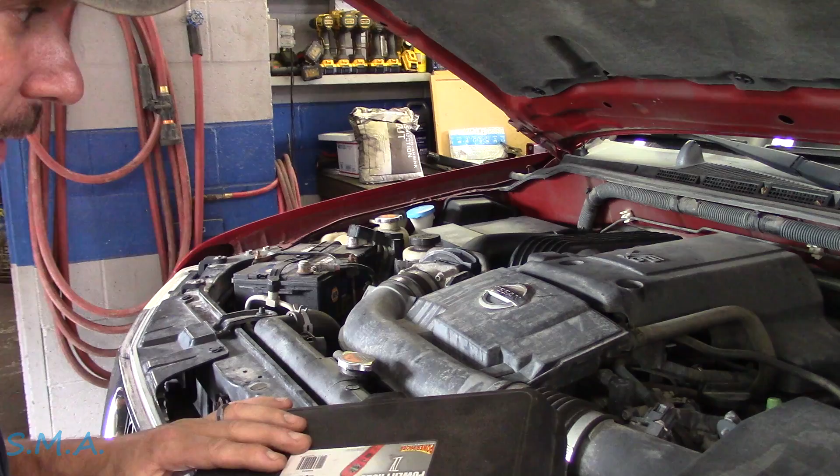I've got it set up on the lift here because I assume we're going to have to go underneath this little guy. Being that we're going to go back and deal with the canister vent valve, I'm going to take the power probe with us. I don't know what kind of bi-directional controls we've got with Nissan as far as being able to command it on and off and stuff. So we want to be prepared. Prepare ye the way. So I'll get this hooked up after I get rid of my giant knot I just put in it. Enhance, unenhance.

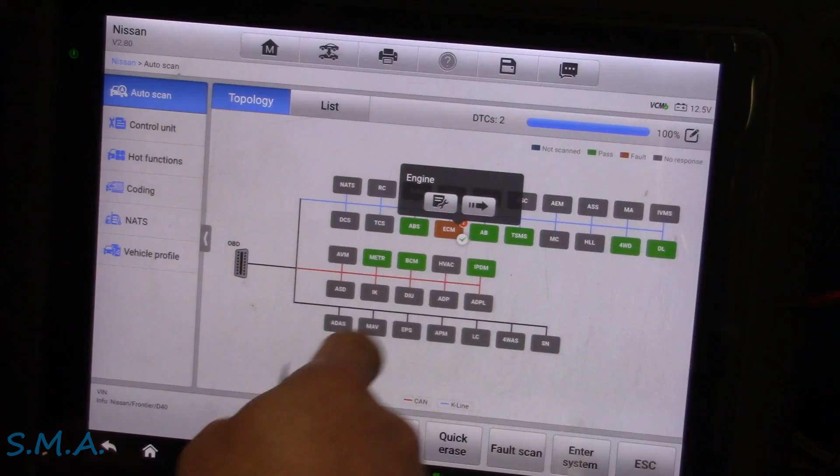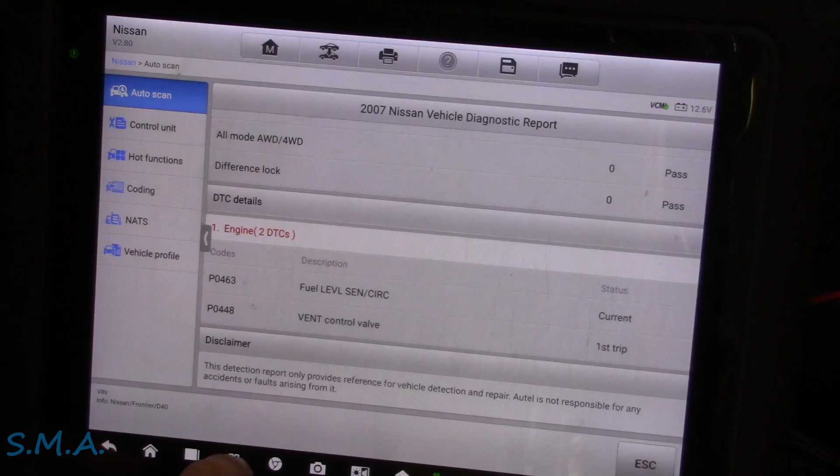She's all done scanning. We've got just the two codes there in the ECM. Everything else is green. I got to remind myself of what they were. So 463 is our fuel level sensor, and then this is just a first trip or a pending code, the vent valve. So that's what we're going to look at first. We will go to our control unit, then the engine, and we'll see what kind of bi-directional control we have for this canister vent valve. And I got our little pick ready so we can go find it and unplug it.

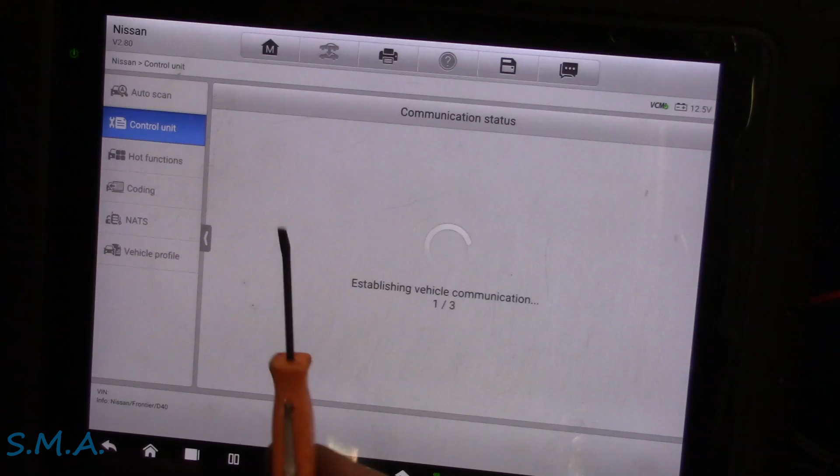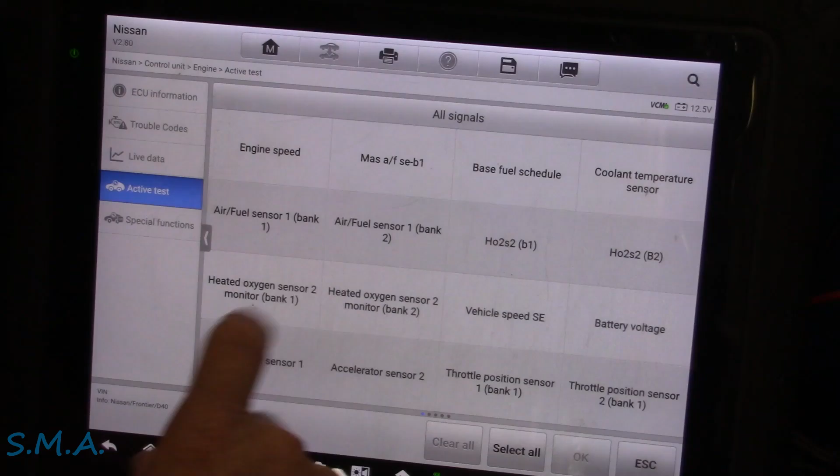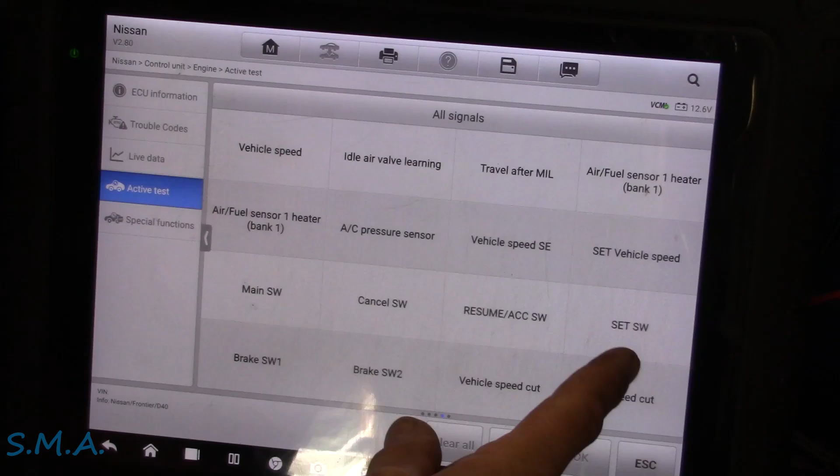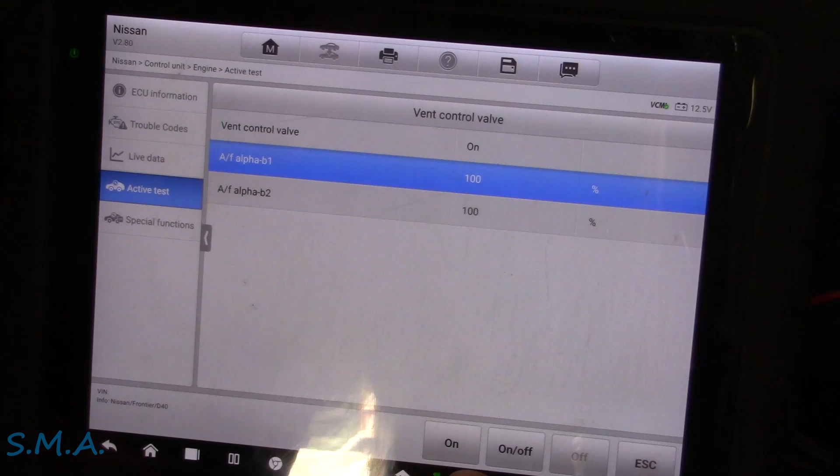We'll go active test, vent control valve. That probably sounds like the ticket. I don't think we need any data, do we? Intake valve, I don't know. Unless we got a PID that tells us that we're actually doing what we're doing. We'll skip it. We don't need any data. I don't hear any clicking underneath the car behind me. Oh, you know what? I think I do actually. Yeah, I'll be jiggered, I do.

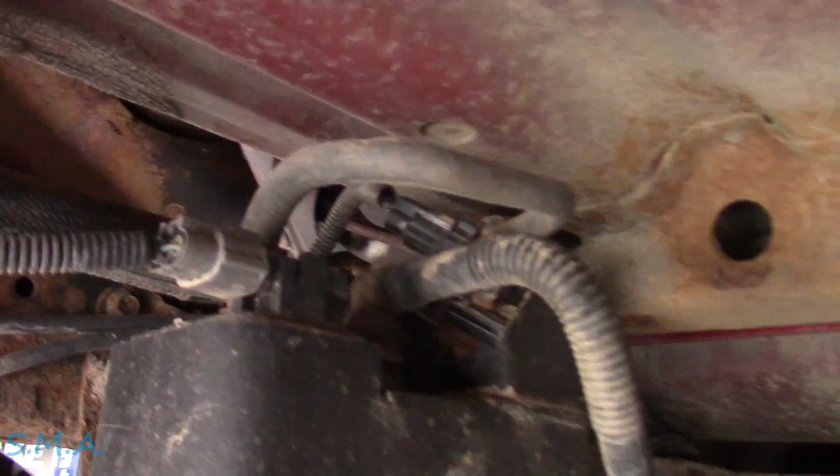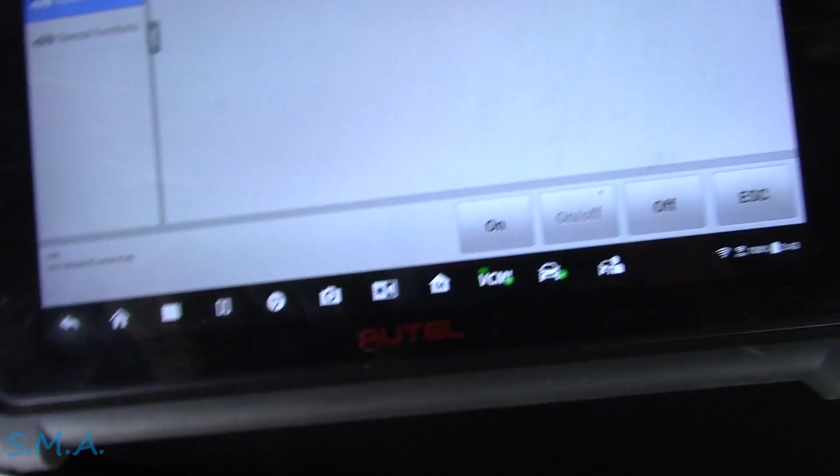So there's the canister vent valve up here, so I believe it should be this little fella right here. Let's turn it on and wait for this car to go by. It's off. Well, be dipped. It definitely seems to be clicking here. For sure. Let's back out of here. Let's get that code number again. I thought it was a circuit code. Was it 448? Got to look in service data.

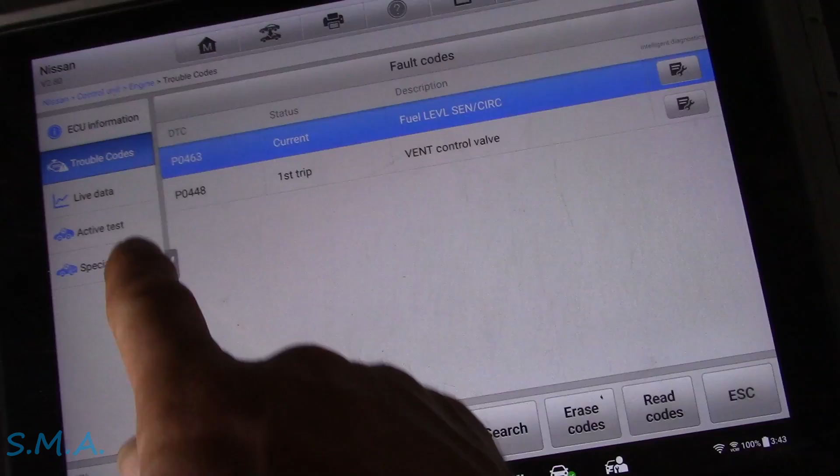448. I think in generic OBD2 I thought that showed up as a circuit code, so I figured we're just kind of an open circuit, but perhaps in OE it may be a performance, because I see she's not really looking like she's a performer, folks. It's pretty crusty. It may be leaking, so maybe a canister vent valve performance code. Let's look up in service data. So here it is, folks. Here's what we're looking for.

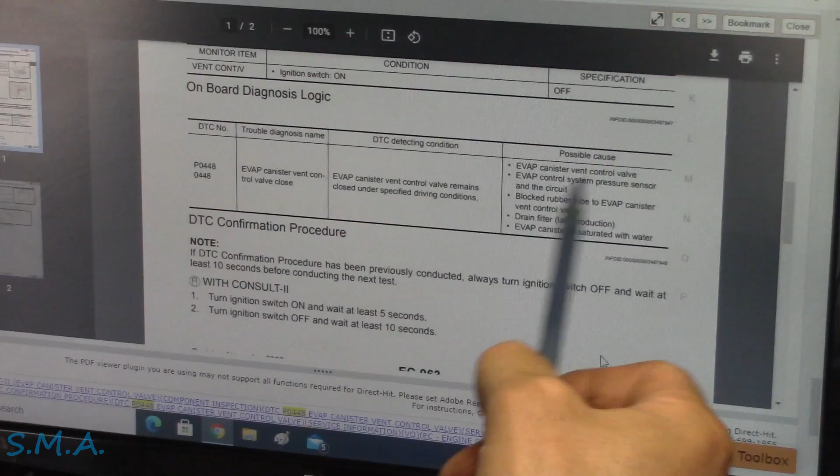So the 448, EVAP canister vent control valve closed, and this is the key right here, detecting condition for the DTC: EVAP canister vent control valve remains closed under specific driving conditions. Possible causes: canister vent valve, pressure sensor, blocked hose to the vent valve, drain filter, blah blah blah. So long story short, it's commanding the vent valve closed. It does its little EVAP thing.

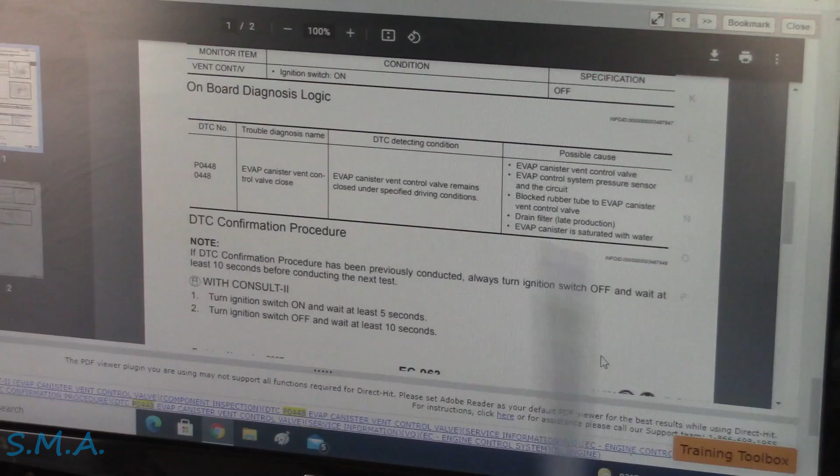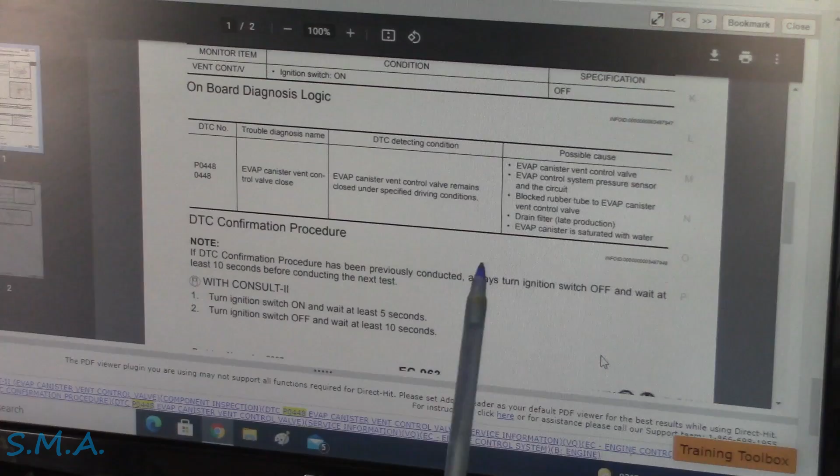It pulls vacuum and then it opens it and it expects to see vacuum decay, or it knows it's open but it's seeing all of a sudden this thing's building pressure, building vacuum, and it says that the vent valve must be at fault, so therefore it sets a code for it. Which may or may not be true. The vent valve could be blocked, or the canister itself could be plugged, or the pressure sensor could be off, so on and so forth, or purge solenoid could be stuck wide open, pulling it into a vacuum.

But that's what we got to look at. I also noticed when I was looking on service data that Nissan has a TSB, or service bulletin, which simply states to replace everything. To replace the canister, the filler neck, the vent valve, the pressure sensor, and everything. All the hoses going up to it, and they had this big long list of all the parts that you can buy from Nissan. Replace everything.

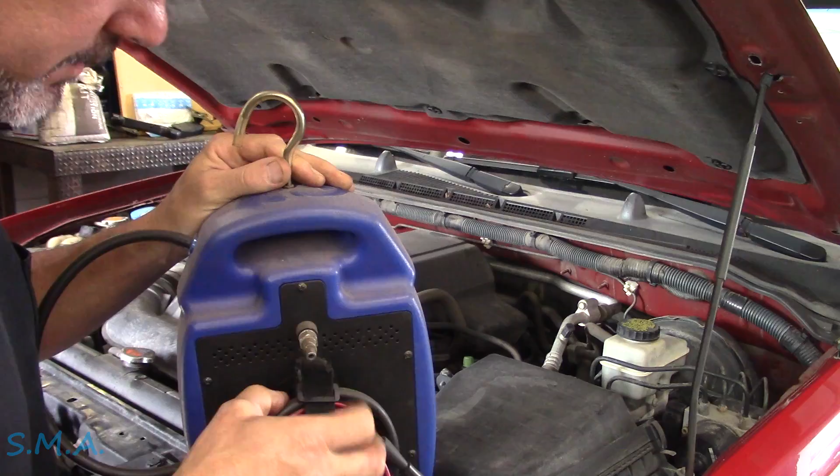We're obviously going to skip that. It's an old vehicle. It's got a lot of miles on it. It's a used car guy. And we're going to see what's really wrong with it, which individual component hopefully we can replace, and then take it from there. So I think the next best step here that we can do is we'll hook up the EVAP smoker. It'll give us some visual aid here as far as what's happening. Is our valve sealing, and indeed is it releasing? And if it is releasing, how quickly? I think this would be the easiest thing to do.

Or at least something to do. You got to do something. So this is what we're going to do. We're going to put this little guy on. The test port, conveniently, is right here, which is great. Hook that up, I'll get an air hose, and we'll fill her full of smoke.

I went back and just popped the gas cap off before we start to make sure it's at atmospheric pressure. I'm not super familiar with Nissan to know whether or not 4 volts is atmospheric pressure. It appears, at least in our case, it is. I guess we'll see. It's always something we can look up if stuff seems strange to us.

So now I'm going to leave the canister vent valve off or open, so the back door is open. So we'll turn on the EVAP smoker. I just click that baby on. We should see a little increase in pressure, but it should be blowing right through the canister and right out the back of the truck right now. Just kind of curious to see where this ends.

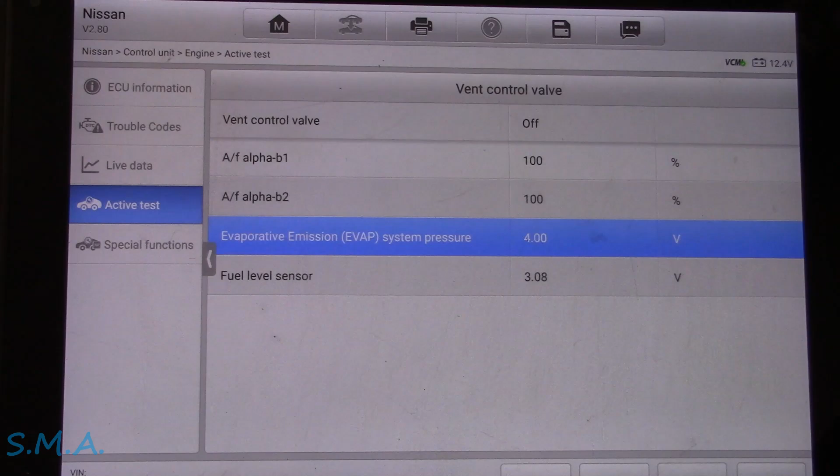And then technically, if I reach up and turn the EVAP smoker off, it should drop back to 4 volts, which I'm going to shut off right now. It is off. Oh boy. Houston, I think we have a problem.

I'm going to turn the EVAP smoker back on, and then we're going to close the back door. And now it should build pressure relatively rapidly, at least what we can see. I don't know how high it goes, probably 4.5. Something like that. So we'll let that build up for a while. We'll make sure the system can seal. But as slowly as that decayed when I shut the smoker off, I'm thinking we probably do have a restriction of some sort.

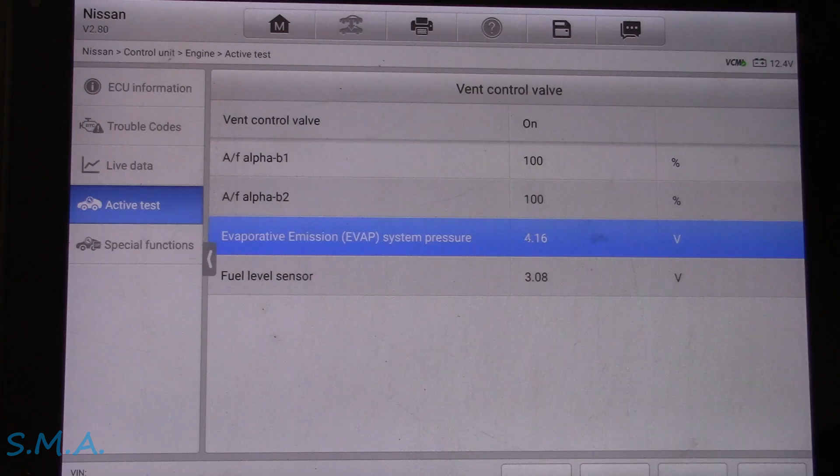I'm just going to shut the smoker off and see if it can maintain pressure. So right now, with the back door closed and the front door closed, it should hold pressure. The smoke machine is turned off. And it should hold that 4.16 for a while. Okay, and it seems to be, so we're going to kick the smoke machine back on, and then we wait. The ball on the flow gauge is almost at the bottom. It's going to hit the bottom. We're going to go underneath and see if we can't identify a restriction.

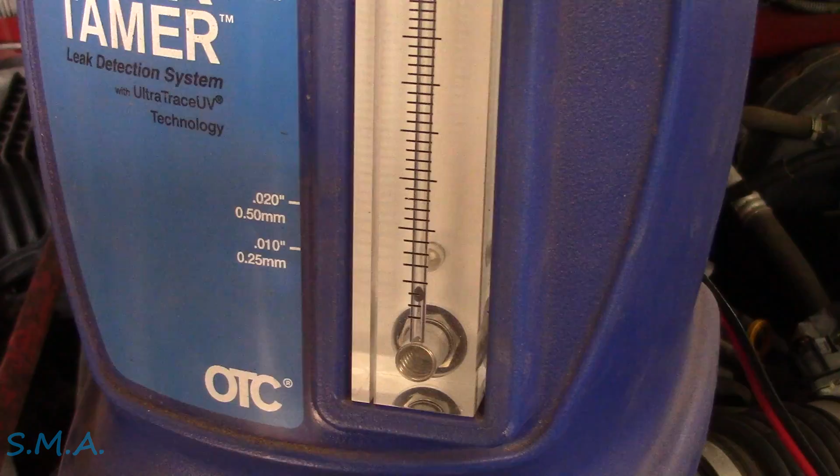So this should be the fresh air side of the vent valve. So I'm going to open it now. So it's been closed. Now it's open. Now the smoke. Yeah, the smoke should be plummeting out of this hose at this point. Just holding my finger over here for a second. Can you guys see where you're at? Okay. Yeah, it does have pressure.

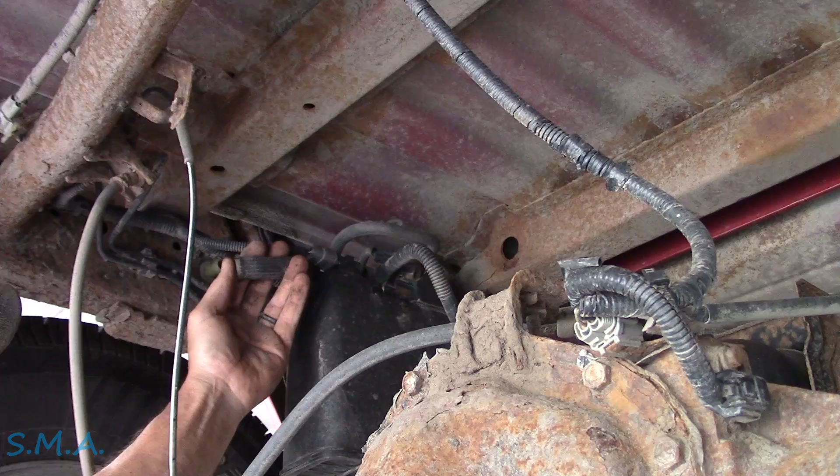Very, very little, but yeah, the smoke should be ripping right out of this now. Whew, I smell the gas. It smells old. Boy, you guys smell that? That's funny, yeah, still no, it takes it a second, it builds pressure. You can hear it. Like that. So that's kind of interesting.

Let's check. That's where it goes into the canister. Let's check it coming out of the tank, perhaps. That's easier to get to 4 hours later. This thing's a mother lover to unhook. This is the tube going from the canister to the tank. And I see we got good smoke coming out of it. I just had to turn the smoke machine back on. Let it build up some pressure here, but it seems to purge out of this quite quickly.

Let me grab my scan tool here. We've got some actual data. So the canister vent valve right now is closed. Of course, we've still got that hose out of the frame. And then I'm just holding my thumb over the other end. I want to see how quickly the canister itself can just purge out this end of it. I'm going to release my thumb in 3, 2. So that goes right back immediately out of this side of the canister.

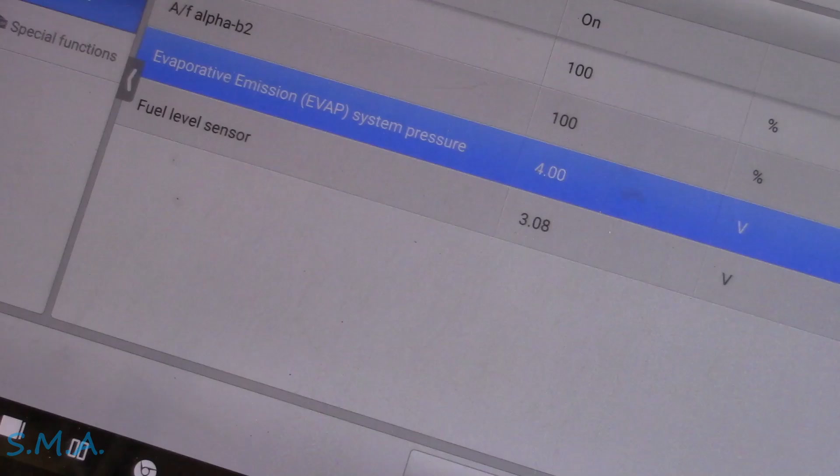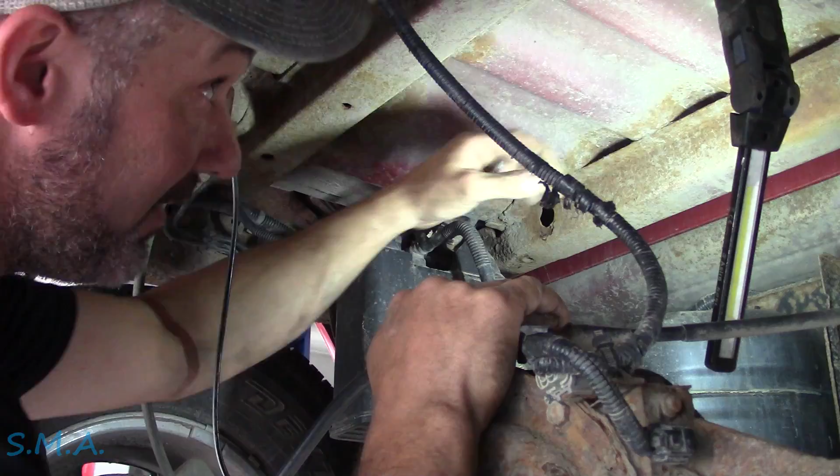So that tells us some stuff. That tells us that either the canister itself is plugged from the vent valve out. This side of it seems to be okay. Or the vent valve itself has a restriction built into it. The problem is, folks, the problem is I touch that vent valve, the canister's about a 95% chance it's going to break.

Let me get my face up in here and have a little closer look for us. Probably going to get a blow nozzle, blow off some of this crud. It's pretty crusty up here. That dirty deed is done. And I did it dirt cheap.

So we got some kind of green hose. What kind of hose is that? We should have the purge coming into this thing somewheres, which that must be. So we've got, I don't know what you guys can see. Hold on, let me look at you so you can look at me. So we got a pressure sensor, hose to the tank, the vent valve, hose out of the canister, the fresh air side. What has me concerned is there's a lot of stinking dirt coming out of that baby, so I'm thinking the canister itself is probably swamped with dirt, and then this must be the purge here.

I have to kind of tweak that out of the way. Idiots build it so you can't turn the purge solenoid or the vent valve off from it. Come on, you mother. Oh, just someday, Eric O, you'll never have to work on a rusty piece of crap. Come on, baby. Good golly, Miss Molly. Got that sucker off there. Oh boy, lots of dirt on that side of the... I can't get the stinking electrical connector off, and I don't want to break it right now. She's rusty, she's crusty. Lots of dirt inside that vent. Of course, the smoke machine is shut off.

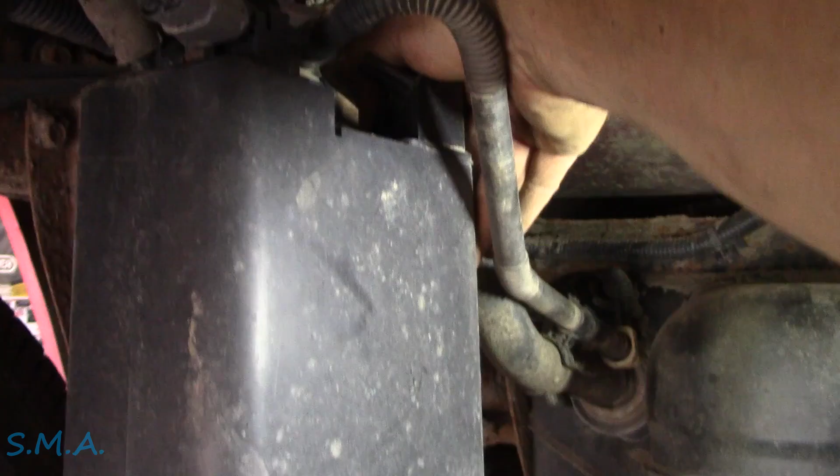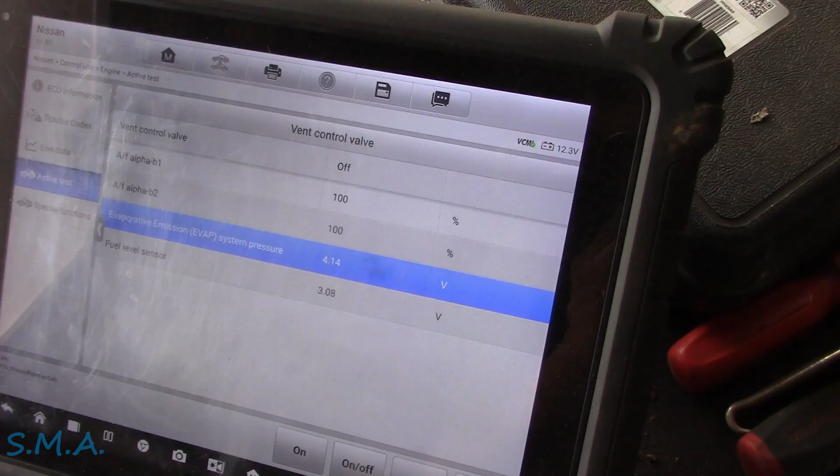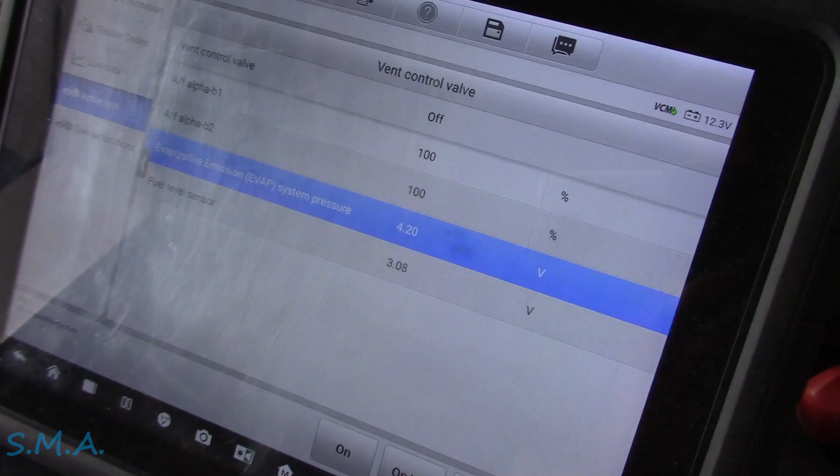So right now, folks, I don't know if you can tell, but the vent valve is still out, and I'm holding my thumb over the hole, and the smoker is on. We're letting it build pressure. We'll let it get up to 4 point whatever it gets to, 4.3, and theoretically, when I remove my thumb, it should instantaneously lose all pressure, which right now we're just wasting time. We already proved that the vent valve works and that the hose going to it is not plugged. Therefore, the only restriction could be is in the canister itself. But just to prove it to you, we're at 4.18, 4.20, good even number to stop at. I'll release my finger in 3, 2, released.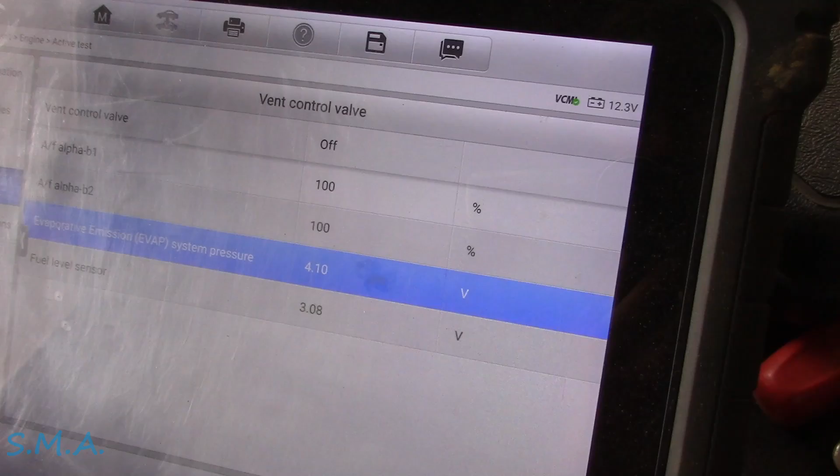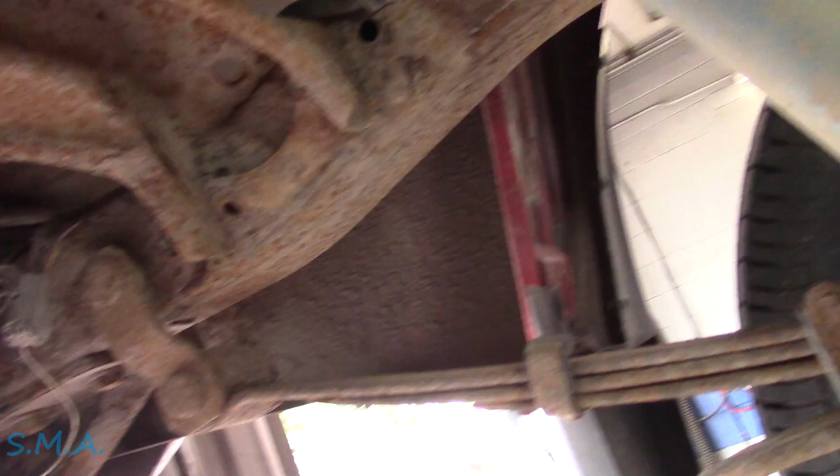And it did not drop. Right back to the 3.9. It's going back. She's going slow. Therefore, 100% definitive. This little guy is plugged. And judging from the looks of the truck, she's probably a dirt road driver in its former life. She's crusty, folks.

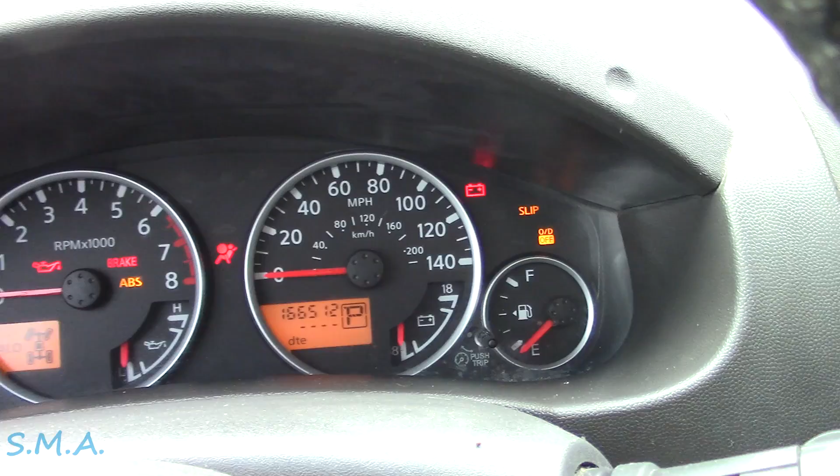Follow up Friday, folks. Even though today's Tuesday, here's the Nissan. Things got a little bit hectic yesterday. I just took it for a rip. Why did I take it for a rip? Because Jason ended up fixing the thing. And as you can see, we now have a functioning gas gauge with a distance till empty. Now works. And no engine light.

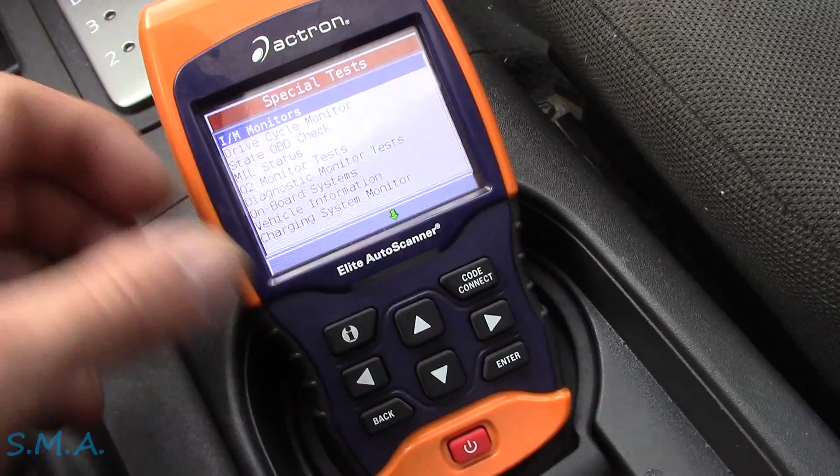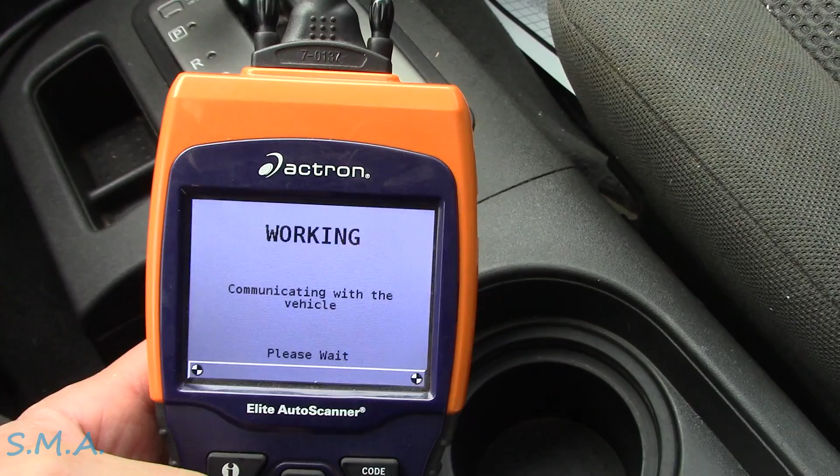And, wait for it. I just tried to run a drive cycle on it this morning here before my 9 o'clocker shows up. And I think we got everything except the O2 sensor, which is not a big deal. Give it just a moment here, folks. I believe even the EVAP ran, which I was pretty happy to see. But oddly enough, the O2 sensor has not run yet.

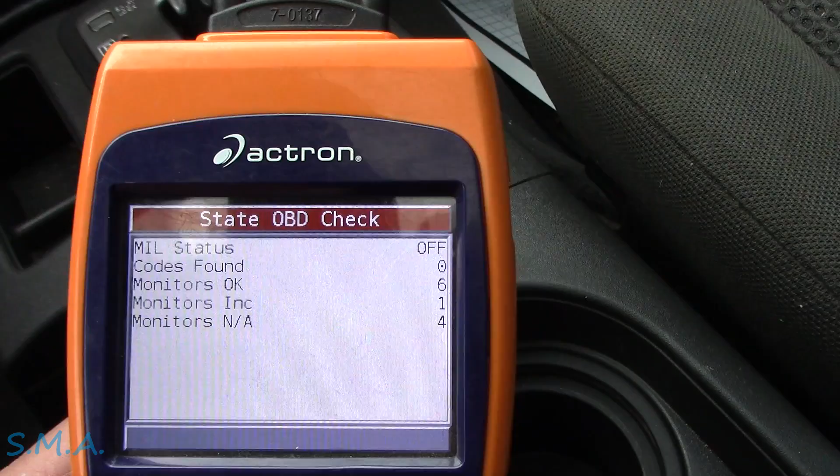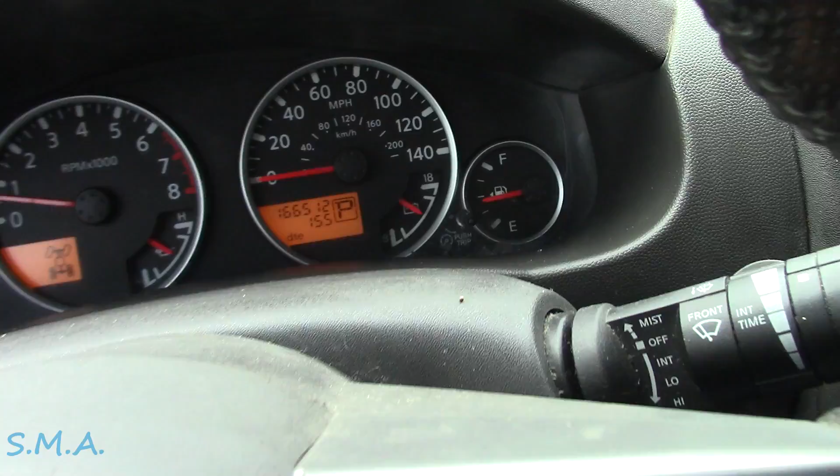But the good news is that we have no codes. So no codes. Our MIL is off. We're down to one monitor, so it could legally get a sticker when he takes it to the place that gives away the stickers. Now, when Jay took the EVAP canister out, that thing weighed about 50 pounds. It was full to the top of dirt. And then the fuel level sensor was just bad. That was kind of a gimme. That was an easy one.

At any rate, folks, I wanted to give you guys a follow-up to let you know where we're at on this. I would have loved to have worked on this myself. However, yesterday we had a couple of no-shows, jerks, and the boys needed some stuff to do. So I fed them some of the work that I was going to do. So Jason took care of this. We took that canister out, gave him a hand doing that, and that thing weighed probably 20 pounds more than the one we put in.

Nissan has an update where you change everything. The filler neck, the canister, all the hoses, just everything goes new. I don't know if that is a fix to prevent the canister from sucking in dirt, or if it's just a shotgun approach for their mechanics at the dealer to get it right and not have a customer come back. Hey, Joe customer, you need everything. That code, you get everything new. Pressure sensor, canister vent valve, canister, all the hoses, the vent hoses, the fresh air hoses, a filler neck, a gas cap. You need everything. So I guess that's one way to what they call CYA, which means cover your butt. I don't know. I'm not a Nissan guy.

And then the fuel level sensor, that was a piece of cake. We were right there. It's just a matter of unplugging the sending unit, open circuit, short circuit, gas gauge went from empty to full, and, bada bing, bada boom, dropped the tank, took the sending unit out, measured it. It was completely open. The little wiper on the fuel level sensor was gone. So that's that. You didn't get to see the repairs.